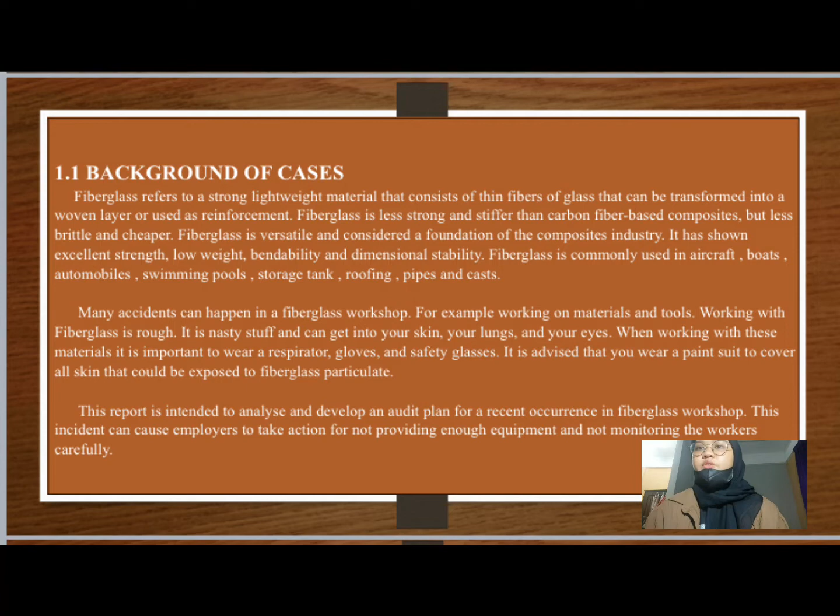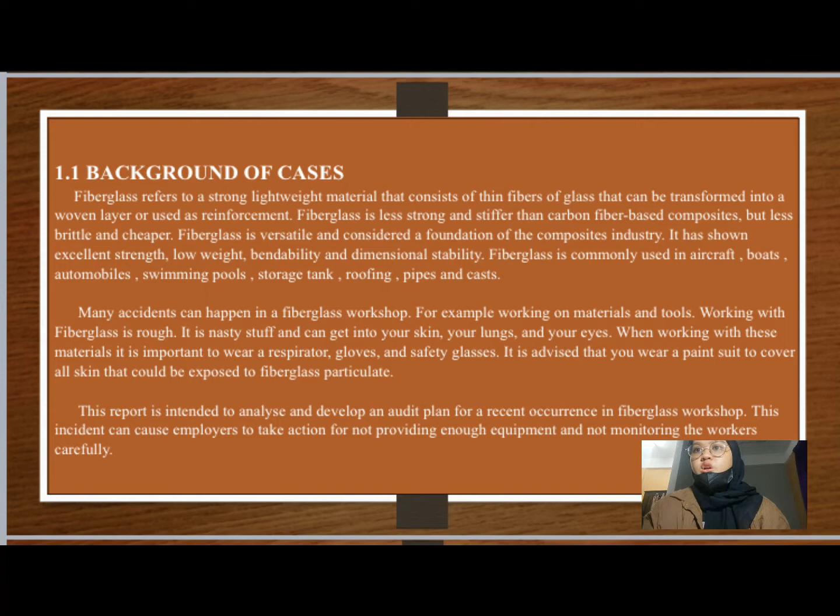1.1 Background of cases. Fiberglass refers to a strong, lightweight material that consists of thin fiber of glass that can be transformed into a woven layer used as reinforcement. Fiberglass is less strong and stiffer than carbon fiber-based composites, but less brittle and cheaper. Fiberglass is versatile and considered a foundation of the composites industry. It has shown excellent strength, low weight, bendability, and dimensional stability. Fiberglass is commonly used in aircraft, boats, automobile, swimming pool, storage tank, roofing, pipes, and casts.

1.2 Scope of audit. The health, safety, and environment audit in fiberglass. The standard operating procedure (SOP) of personnel during working on fiberglass workshop shipyard. The hazard identification in a workplace and evaluation on impact of chemical waste on environment. Risk because the chemical substances to health and environment.

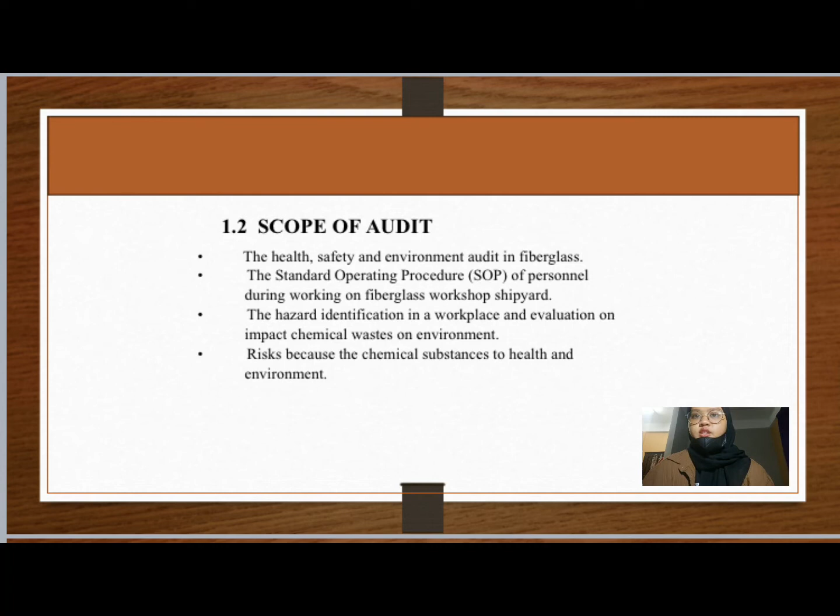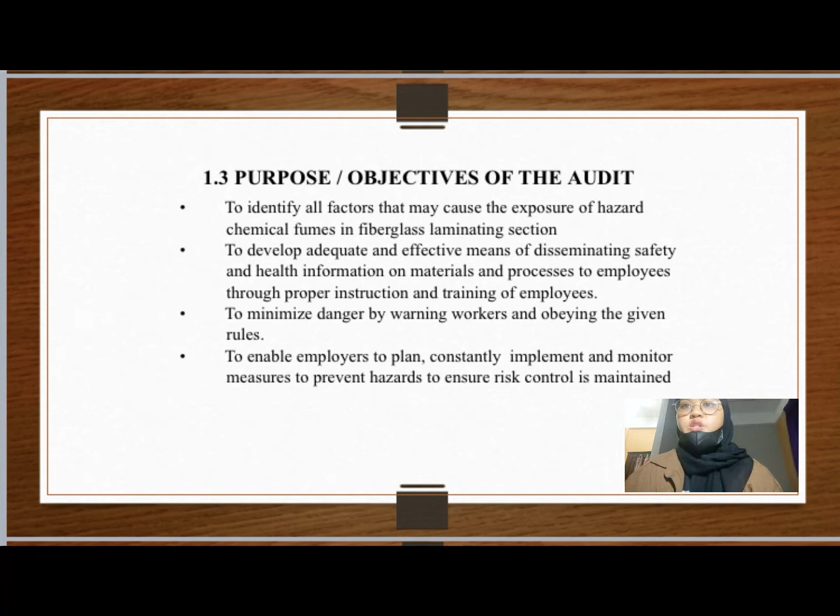1.3 Purpose or objective of the audit. To identify all factors that may cause the exposure of hazard chemical fumes in fiberglass laminating section. To develop adequate and effective means of disseminating safety and health information on materials and process to employees through proper instruction and training of employees. To minimize danger by warning workers and obeying the given rules. To enable employers to plan, constantly implement and monitor measures to prevent hazard to ensure risk control is maintained.

2.2 Audit Team. Our audit team is responsible for preventing any accident or incident from happening in order to minimize the possibility of hazard and risk to health and environment. Task: distribute checklist and audit form. Person in charge: office worker. Responsibility: the audit checklist and audit form should be prepared.

Task: site visit. Workplace: person in charge, top management and task force. Responsibility: to inspect the condition of the place of work. Task: PPE inspection. Person in charge, task force and workers. Responsibility: to make sure the safety and condition of PPE is working and maintained properly. Task: vent inspection. Person in charge, task force and workers. Responsibility: to make sure everything is flowing properly through the vent smoothly.

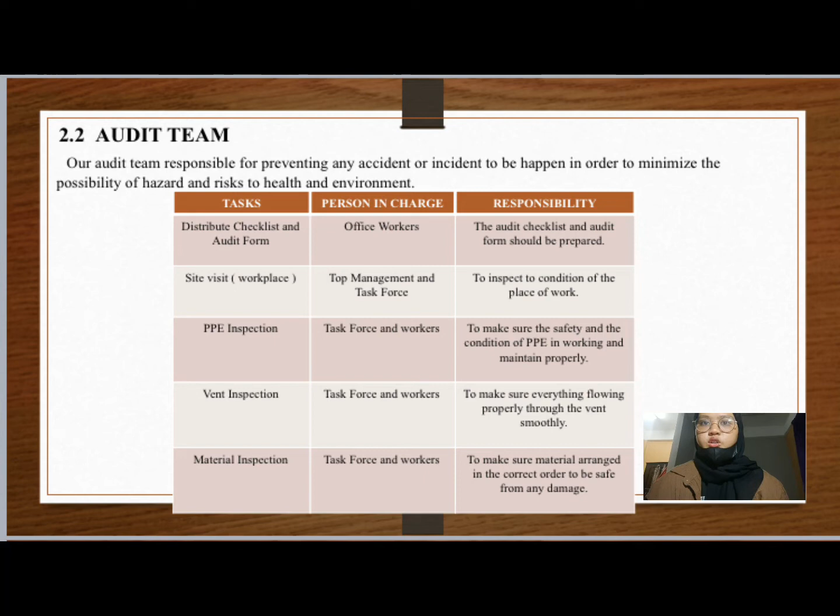Task: material inspection. Person in charge, task force and workers. Responsibility: to make sure materials are arranged in the correct order to be safe from any damage.

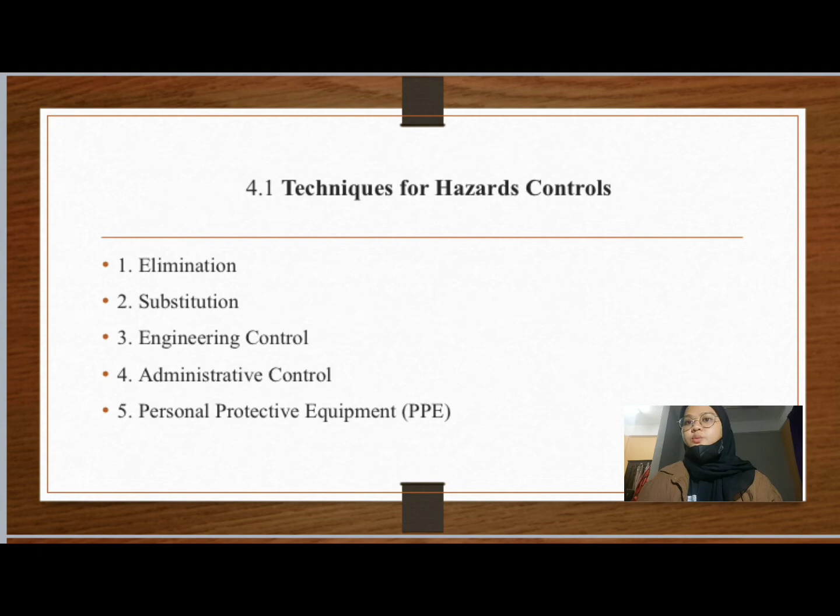4.1 Technique for hazard control: 1. Elimination. 2. Substitution. 3. Engineering control. 4. Administrative control. 5. Personal protective equipment (PPE).

Methods to control hazard. Elimination: removing a hazardous task, tool, method, gadget, or substance may be a good way to protect workers. For example, due to the risk of explosion, a salvage fleet may decide against purchasing and chopping up a scrap bulk gasoline tank.

Engineering control: engineering controls entail rethinking a method for putting a barrier between a person and a risk, or casting the risk away from the person, such as equipment guarding, proximity guarding, extraction structure, or moving the operator to a remote position away from the hazard.

Administrative control: adopting broad working techniques or secure work practices, or providing appropriate education, instruction, or knowledge to decrease the capacity for harm and damaging fitness consequences to men and women, are examples of administrative controls. Administrative restrictions include tactics such as isolation and work permits.

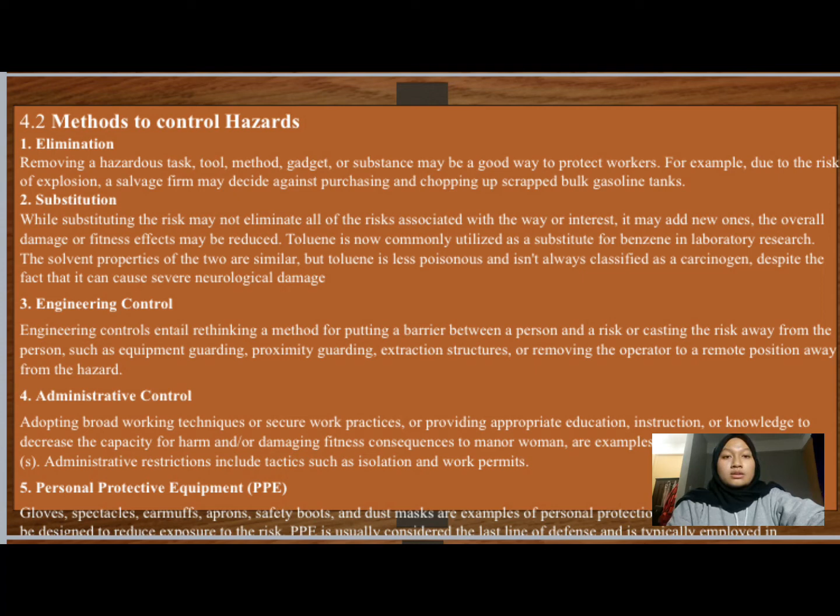Personal protective equipment: gloves, spectacles, earmuffs, apron, safety boots, and dust masks are examples of personal protective equipment that can be designed to reduce exposure to the risk. PPE is usually considered the last line of defense and is typically employed in conjunction with one or more of the other control measures.

Item: PPE set, 80 units. Price per unit RM100. Total is 8,000 Malaysian ringgit. RPE set, 80 units. Price per unit RM50, and the total is 4,000 Malaysian ringgit.

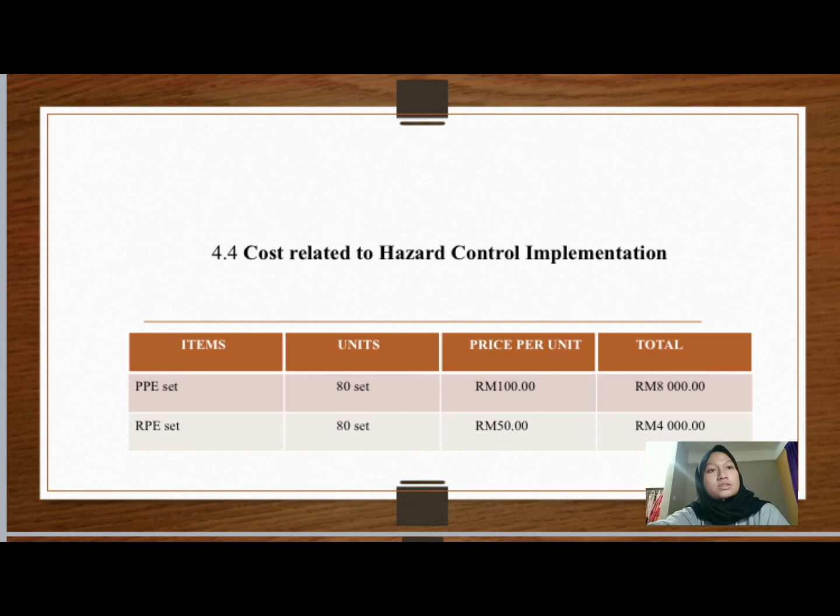HIRARC monitoring schedule. Every day, before and after shift, check every person's entry log that comes in and out of the fiberglass workshop conditions, and inspect for new hazards. Every week, inspect and analyze the preceding hazards that occur at work and prepare potential hazard reports. Every month, PPE condition and maintenance inspection and briefing all staff on safety awareness.

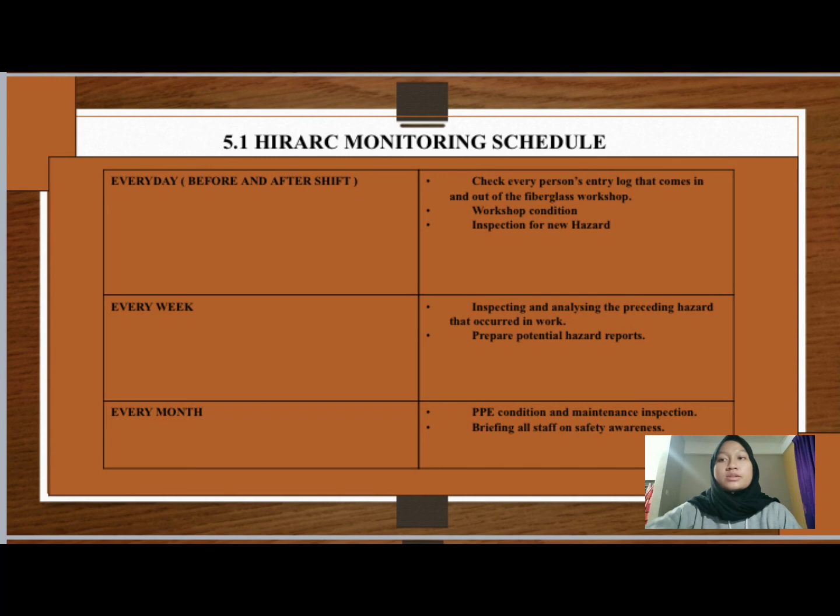HIRARC post-audit checklist. Is the working condition getting better? Is the PPE properly maintained and utilized? Are the employers in good condition? Is there proper follow-up to the hazard controls? Does it raise the risk of hazard? Are there new hazard threats that pose a danger to employees and occupational safety and health? And the last one is, does the new chemicals used for laminating present a new risk to the employers for health hazard?